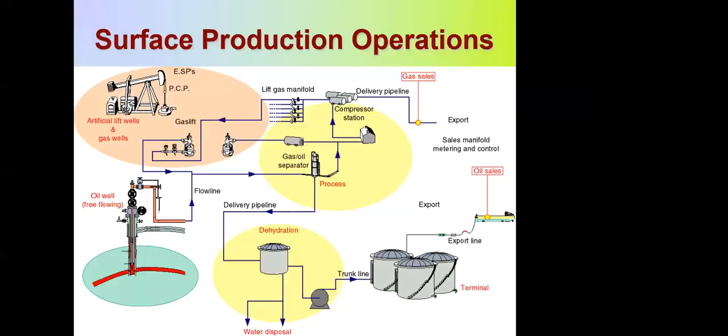Thank you very much, Niharika, for the brief presentation. Within these 2 days, today and tomorrow, we will talk about surface production operations, and also mention the facilities used on the surface for these operations. After getting the oil out of the wellhead, what shall we do with it? How can we make the crude oil suitable for the market? That's the aim of this workshop today and tomorrow, and during that we will cover a few activities and points in the agenda.

As Niharika mentioned, I am a petroleum engineer, so I am in the heart of the business. I have more than 40 years of experience mixed between academia and industry. I used to work in the oil fields, onshore and offshore. I worked in Iraq onshore, south of Iraq, in Rumaila, Basra, and also in UAE, Abu Dhabi, Adnoc. I worked in Aberdeen in Scotland, North Sea. So I mix between onshore and offshore. My PhD is in reservoir engineering, but my MSc is in production engineering, so I mix between production and reservoir.

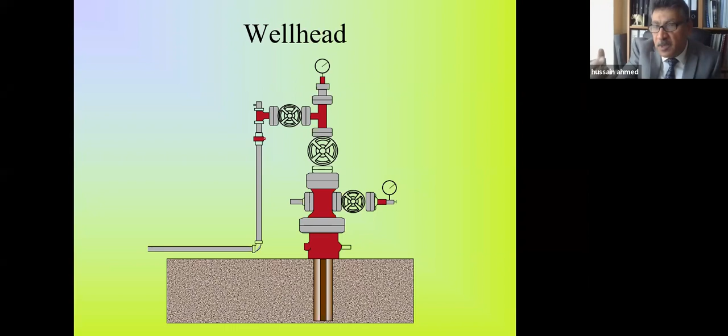Separators could be of different shape, different size, different design, both externally and internally, but one principle: the principle is to separate gas from oil and also to separate water from oil. So in the separator I have one input, but I may get three outputs: gas, oil, and water. It depends on the properties of my crude oil.

So that is, for example, the wellhead. This is just a typical flowing well, I can say - natural flowing well sometimes, and sometimes, of course, the well could be flowed and produced artificially. So this was the production equipment, which is our workshop is about - the production equipment and operations. The first equipment we go to is the separators.

I need to know how it works, what's inside them. At the same time, I need to know this oil flowing in the flow line from this well - is it natural flow, depending just only on the pressure of the reservoir? Or did I use something else to make it produce, such as a gas lift or ESP, or the RSP, the rod sucker pump?

Did I do any water injection or water flooding? Did I do any gas injection or gas flooding? These are important. Why important? Because it will affect the production rate and also the content of the crude oil.

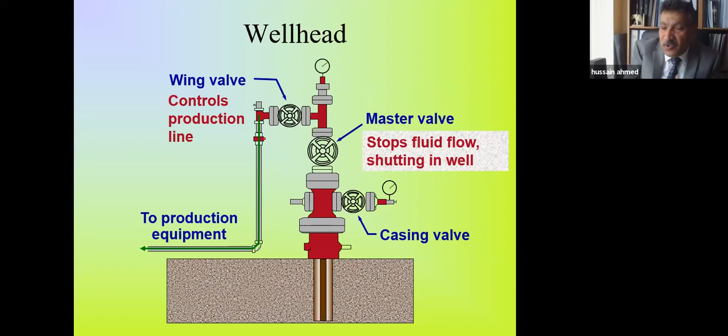Most of the people in mature fields are suffering from water cut. They say we are very much suffering from too much water coming to our separator. And this problem is sometimes because of emulsion, because of scale buildup, because of corrosion. And then I need to know where the water is coming from - is it natural water, or because of my water injection or water flooding or whatever? So it's important to know what have you used in order to produce the oil from the wellbore.

And even the water, after you remove the oil out of it, what shall I do with it? Shall I throw it in the open lake or open river? The answer is no, because it still has something inside it. So I need to have a disposal well, for example, to inject that water in a certain formation in the ground. Or maybe if I treat and keep it properly, I may use it later on for water injection.

If somebody asks me, in production I have produced water, but I have treated that water - now the water is treated very well, has a good pH value, has no sand particles, not much oil left behind it - can I reuse it in water injection? The answer is yes, you can. I'm talking about the water after de-oiling.

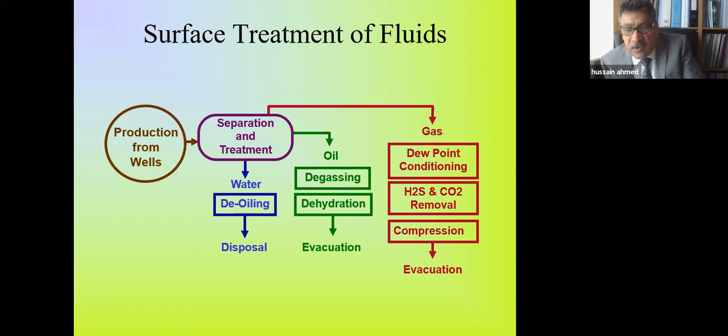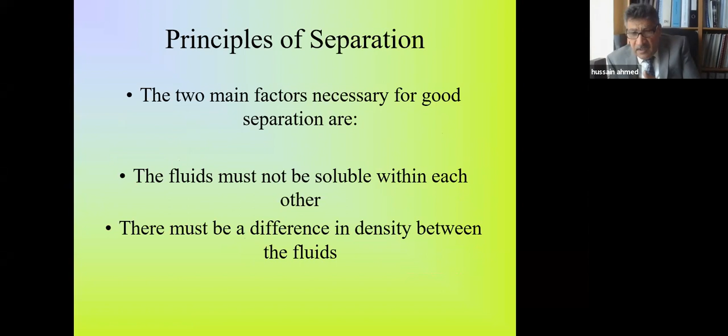I mentioned to you the principle of separation is based on the idea of gravity as well as pressure differences. So pressure differences and gravity separate, segregate oil from water, because water is heavier than oil, and gas comes out due to pressure differences.

This, I will let you know now. I will not go through the slides one by one or word by word, because there's no time to cover that. So I will give you a nice brief idea.

Does the separator take all the gas out from stage number one? The answer is no, some of the gas could remain. If plenty of gas remains, then I have to build a stage number two or stage number three. They call them the trains.

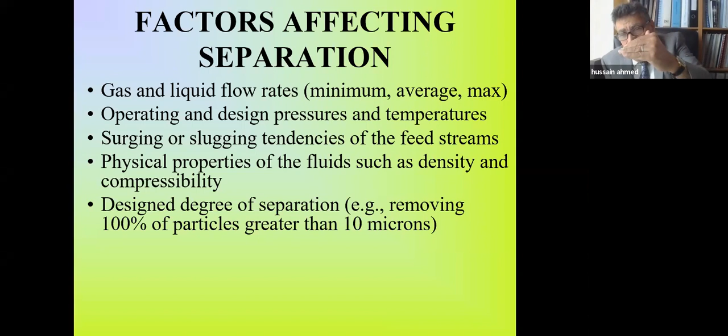And do the separators only take the gas? The answer is no, it takes the water out of it too. What do I mean? I mean, in this case, I have a barrel or a vessel or a tank which has three compartments inside it: one for gas, in the middle oil, underneath we have water. Sometimes we call it a three-phase separator.

So for separators we need to think about pressure in it, capacity, flow rate, how much in, how much out, and retention time. How long does the oil stay in the separator to be separated? How long, 1 hour, 2 hours? The answer is no, no more than 3 minutes.

Sometimes even less than that, 2 minutes, 1 minute is enough. You cannot leave the oil inside the separator for a long time. It's a continuous process, continuing every single minute. So the retention time is short, should be around 3 minutes. They say between 30 seconds, half a minute, to a maximum of 3 minutes, depending on how much gas is in it, how much water is in it.

As well as the other things in the oil. Does the oil have sand? Does it have paraffin, wax in other words? Does it need more chemical additions or additives? It does have salty water, and the salty water has scale. The scale is made of calcium and magnesium. So if that water coming with the oil is rich with calcium and magnesium, it builds scale inside it. These also are important to be looked into in terms of treatment or operations of the produced oil.

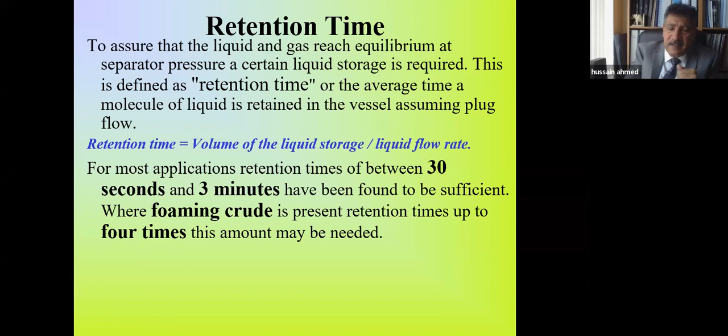Don't forget, retention time also sometimes depends on the API of the crude oil. A lighter, higher API needs more retention time. But if you have heavy oil, maybe smaller, because there's not much gas inside it. Heavy oil with API 24, 22, 20 usually doesn't have too much dissolved gas inside it. They have asphaltene, yes. They have paraffin, yes. They have sand, yes. But not much gas.

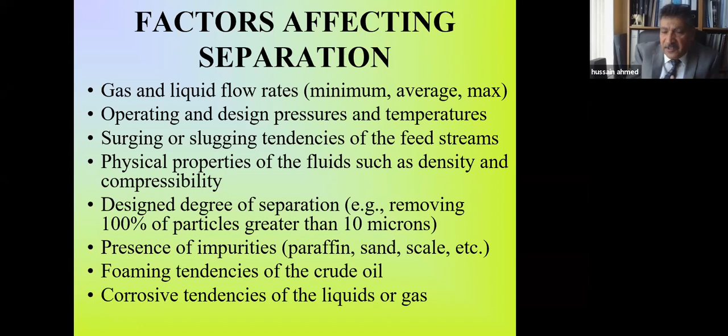Lighter oil, API 33, 35, 36, 40, has a higher GOR or more gas inside it. So the retention time should not be very large or very long - it should be short in this case.

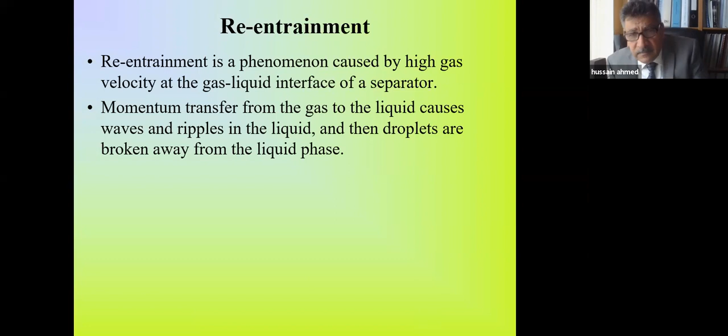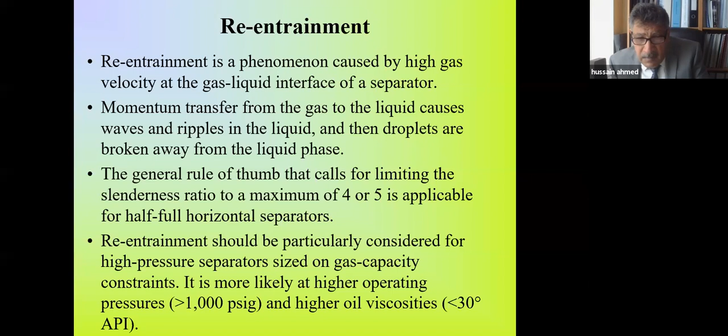You have re-entrainment, which is a problem of splash between gas and liquid, or gas and oil. These are like misty things, and they could lead to what I call carryover, liquid carryover. So it should be minimized by at least controlling the pressure and keeping it always steady. The separator could be done in one stage or two stages, depending on how much gas you want to remove.

As well, we have something called the free water knockout. Especially if the water cut is very high, it's recommended to put the oil into a big tank, leave it quiet, let gravity work - by this the water will settle first and the oil will be on top. We call it the free water knockout.

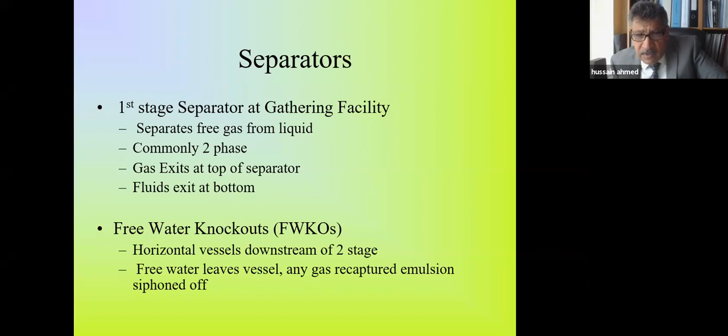This slide is about one common problem in the produced oil: the emulsion. Remember this word, emulsion. It's a problem - if we have too much emulsion leaving the free water knockout or the separator itself, then it's not good.

Always remember, the higher the water cut, the more the chance for emulsion. Emulsion is a mixing of two different liquids, water and oil. They don't mix properly because of difference in viscosity and surface tension, but they create a phase where the main body is water with oil inside it - we call it oily water.

Or the opposite: the main body is oil, with some droplets of water suspended in that body of oil. They don't settle down because either the oil has a big viscosity, or maybe the oil is heavy with a high gravity factor, or the size of the water droplet is too tiny to settle down.

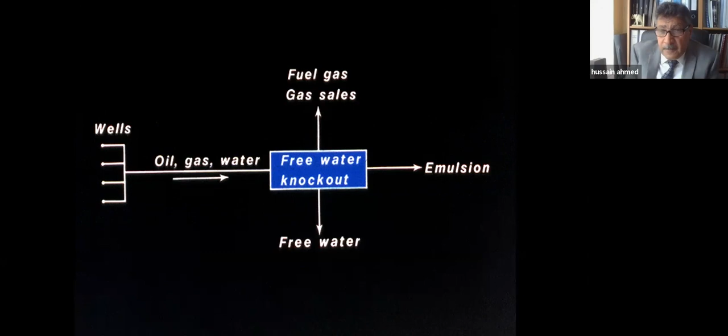So we have an oily water and a watery oil - major body is oil with some water droplets aside that need to be treated. We're going to, hopefully today, explain some of these methods.

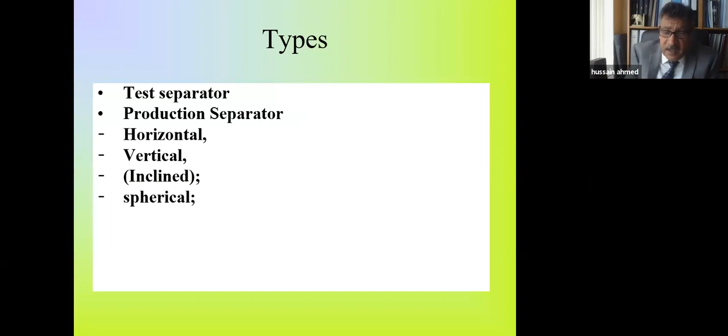These are in gas reservoirs, so I won't talk about that now. The separators come in different types - could be vertical, horizontal, spherical, two-phase, three-phase, and so on.

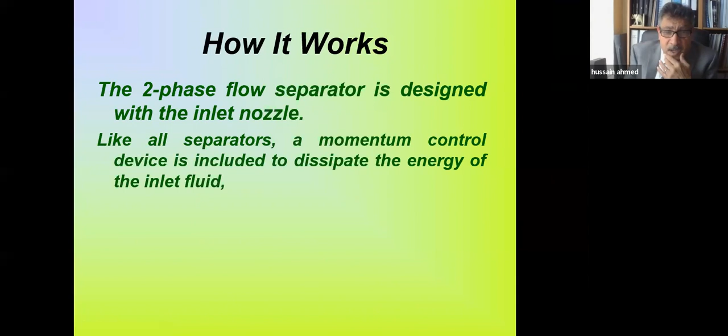The separator is based on the idea of pressure differences built up, and that helps in dealing with them. The pressure inside the separator is less than the pressure from the wellhead, and that helps the gas to come out. Also, the gravity factor: water is heavier than oil, so it settles down because of gravity.

We have something called, sometimes, the Vortex Breaker, a small mechanical unit at the bottom of the separator, on the outlet of the water and oil pipelines, or takeoff. These prevent the escape of gas with the oil or water by breaking the vortex.

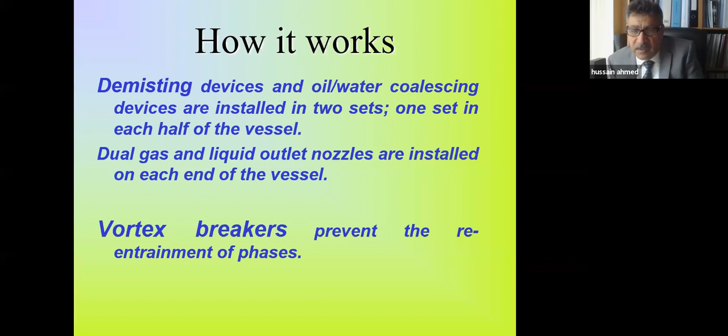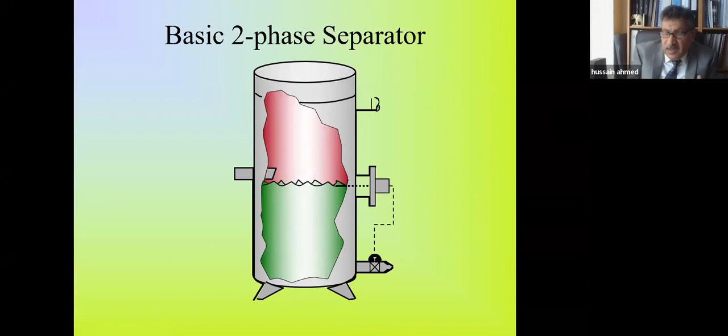So you have a flow coming from the wellhead, or from wells, more than one, coming inside the separator at a certain pressure. Could be 200 psi, 250 psi, sometimes 300 psi. And the size of the pipe entering is about 6-inch, sometimes 8-inch.

Once it enters, it hits a baffle and they separate gas from oil. That gas needs to be treated later on, and the oil also needs to be treated later on, as mentioned earlier. We have something called the level indicator.

Sometimes you have a sight glass as well to see the level of oil in the separator. But this is, of course, a controller. A signal will go to this control valve. So if the level of oil is building up and there's too much oil, it will open wider and take it out.

If the oil level is getting lower and lower, and water is coming at the bottom, then a signal will go to the valve to close, to not allow the water to come through, separating properly. So the valve opens or closes according to the oil level, which you set up at a certain level.

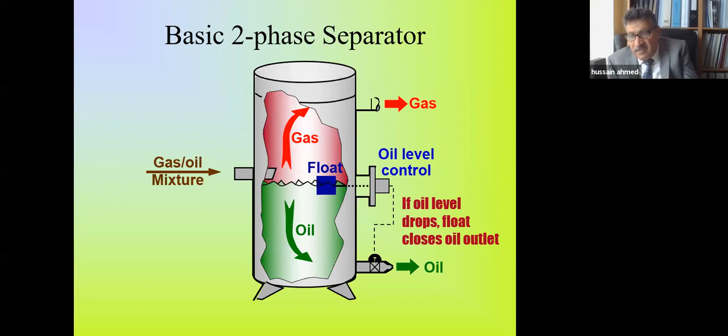This is another type of separator. We call them, again, separator vertical, horizontal, spherical, two-phase, three-phase — all work under one principle. The principle is to separate oil from gas based on a pressure drop, and to separate water from oil based on the principle of gravity and density differences. Whatever it is, the shape doesn't matter.

In the entrance of the separator we have something called the inlet diverter, or sometimes inlet baffle, or momentum absorber. These also slow down the movement and help separate the liquid from the gas.

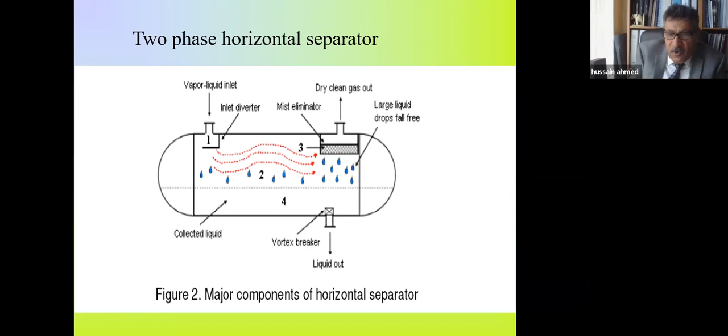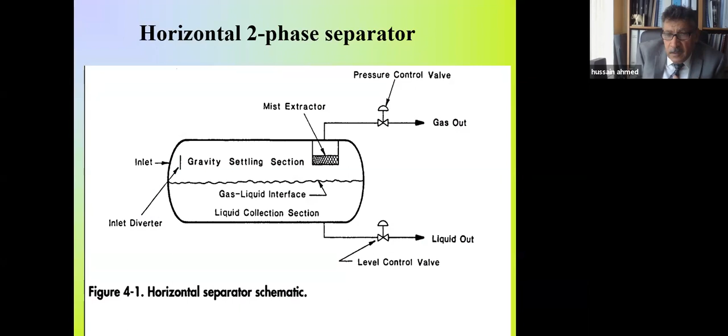This is horizontal two-phase. This is horizontal two-phase. This is horizontal two-phase. This is vertical two-phase, the most common one usually. This is also horizontal, vertical two-phase, same principle I mentioned earlier. Same idea, so I'll not go through it.

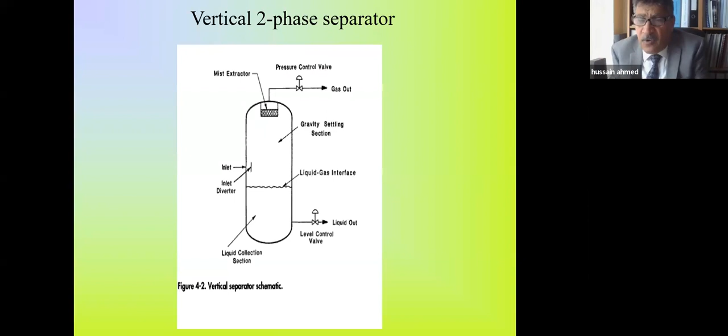Of course, there are some other factors to look into. If you are a designing engineer, the question is how do they design it? How do you know that this size of separator is enough for this oil field, or for this gas oil ratio? So we have designing elements, calculation elements, in terms of what they call the gas space or the gas compartment, the top one. They calculate that according to the pressure, density differences, diameter, discharge coefficient, and so on. This is not our topic for today, but it could be covered in more detail if we do a course on that - then we'd have more time to explain and do calculations.

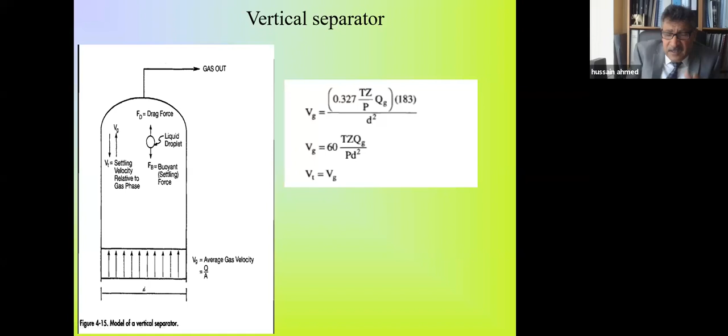Again, the gas velocity, VG. How do I calculate the gas volume, the gas compartment part? How much is it, how can I calculate the size of it? These are the equations used for that. Again, it's not part of our workshop for today, because if I do calculations, I need more time.

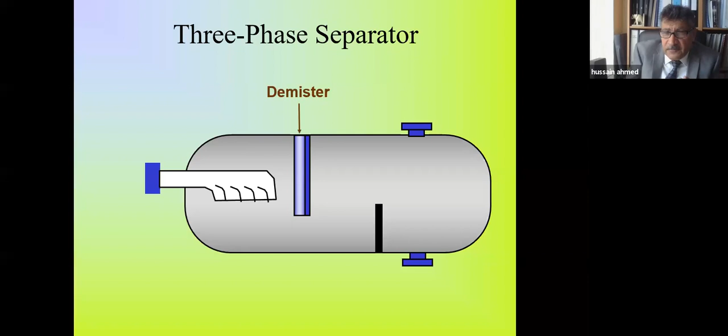Horizontal two-phase, and also we have horizontal three-phase separator. These are the most common ones, and they are very much used nowadays in most of the oil fields.

A three-phase separator - I'm asking you, why three-phase? The answer: because we have three flows out of the separator. We have water stream, gas stream, and oil stream. So three phases.

What about sand? Sand may be accumulated within the water part. What about H2S? H2S is within the gas flow. What about paraffin? You mentioned paraffin is a problem - paraffin will be inside the oil. What about scale buildup? The scale will be in the water compartment, because scale, based on the type of salt - calcium or magnesium - is in the water.

We have mentioned the demister in different ways, could be on the outlet, could be in the middle of the separator. A new word now came to me: weir, another internal component. So remember, now we have mentioned internal components for the separator. We mentioned the inlet diverter, we mentioned the demister or mist extractor, and now we are mentioning the weir.

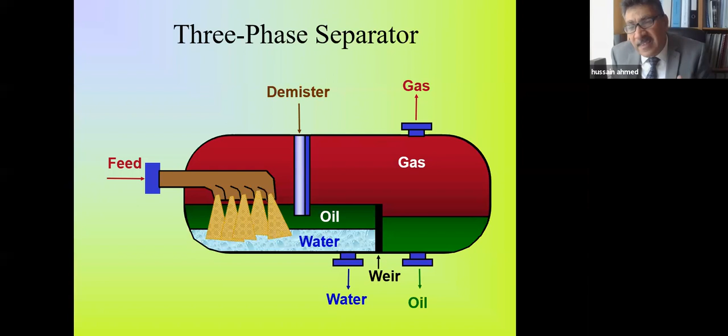I repeat myself: the name will be the name, three-phase or two-phase, horizontal or vertical. The principle remains the same principle, which is density differences and a gravity factor. But the designing is different - you see, this is the designing.

There's another one, another three-phase separator, but in a different design. I have one inlet and I have three outlets: a gas outlet, an oil outlet, and a water outlet. But the designing is a different way, different designing.

This was something else. This is also a typical three-phase separator, horizontal one, as I mentioned to you earlier, and we mentioned the weir and so on. So same principle as we have.

Externally, now - I have mentioned to you internally I have inlet diverter, weir, vortex breaker, demister - these are the internal components. The external components, I could see something like a pressure gauge, a thermometer or temperature gauge, I can say.

This is a sample of a pressure safety valve or pressure relief valve. That's on the top. They send the gas to the flare if needed, in case of emergency shutdown.

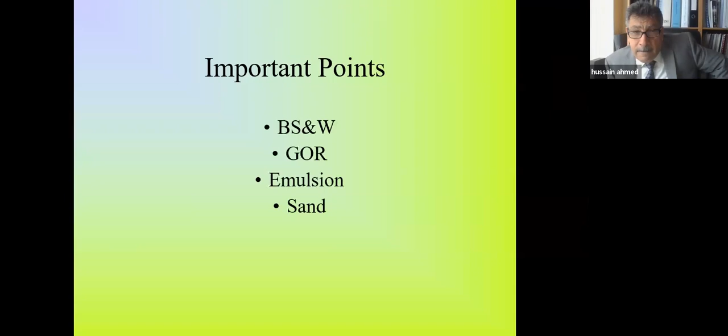So the important issue I need to know as a production engineer is how much water I have. We call it BSW, the basic sediment and water, or sand and water. How much sand, because plenty of sand sometimes could lead to a blockage inside the bottom of the separator.

Too much sand settled at the bottom of the separator, especially on the water compartment, will reduce the holding capacity of the separator. Remember, I have 3 compartments in the separator: one for water, one for oil, and the top is for the gas.

And there's some kind of interface sometimes. We call it an interface here between oil and water, oil, emulsion and water. This word emulsion, I don't like it, it's a problem. So emulsion is one of the problems.

Too much water and too much sand is also a problem because they will block the bottom of the separator and need to be washed from time to time.

The GOR, that's the associated gas - I need to make sure the gas leaving the separator is as dry as possible, free from any liquid or condensate. This is what we call the demister's job.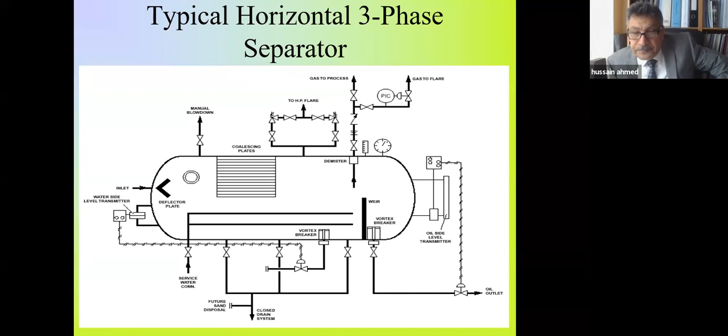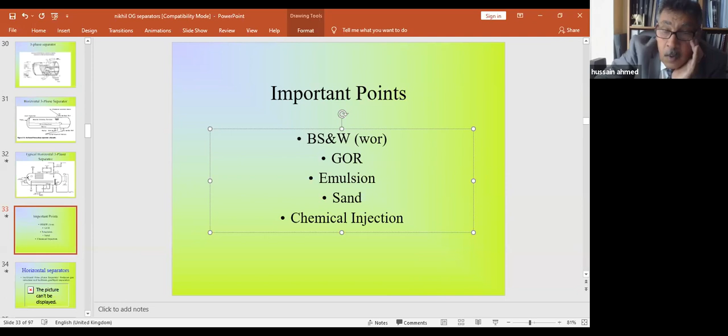So these are important points to consider when we talk about separators. You should ask how much water cut, water percentage. In certain countries or certain companies, they name it WOR, water oil ratio. It also needs to be known.

GOR, same as gas oil ratio, or we call it associated gas. Emulsion, sand - I don't like it, I need to treat it and remove it.

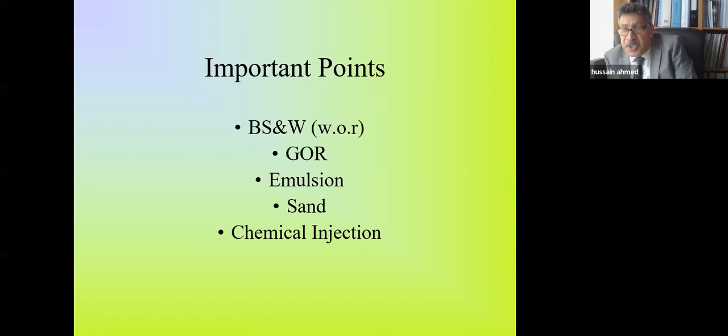And chemical injection - why do I need to inject? I already mentioned I inject demulsifier, I inject antifoam or defoamer, I inject corrosion inhibitor, and sometimes I inject softener to remove or stop scale buildup. These could be some of the chemical injections.

Of course, they have different trade names. I don't know the trade names, I just say in general demulsifier, and I say antifoam additives or defoamer, or corrosion inhibitors, or anti-scale or softeners. Therefore, it's crucial to be aware of these chemical additives, as it's part of my operations.

Remember, our workshop is about production operations, and one of the most important operations is the degassing station, the separation of the separators. And within the separators, you have problems.

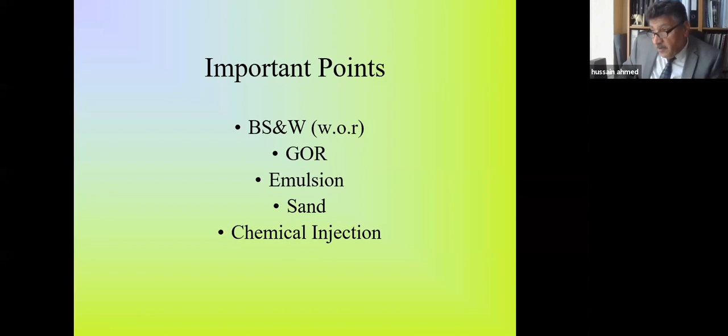So you need to know how I deal with it. Within the separator, you need to know what are the internal components inside them, and what is the function of each component. If somebody says to me, Vortex Breaker, I need to know where it is, what it does, and how it could go wrong.

The Vortex Breaker can go wrong if we have too much scale buildup in the water section, or too much wax in the oil section. By the way, if somebody talks about scale problem, that usually happens in the water section. If we talk about paraffin blockage, that happens in the oil section or oil compartment.

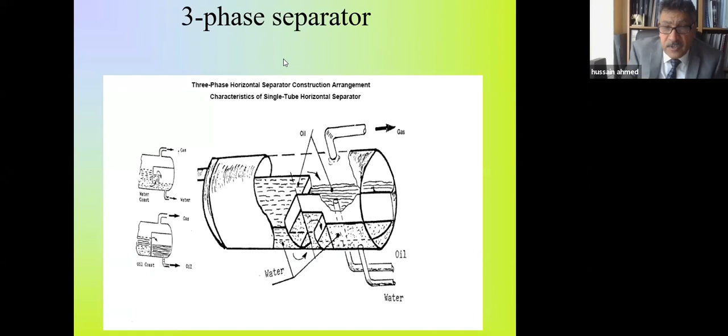If we talk about emulsion, that will be at the oil and water interface contact. In that area, in that line, I have an emulsion because the oil is in touch with water, and due to turbulence we have that issue. I hope these messages are clear and useful for you.

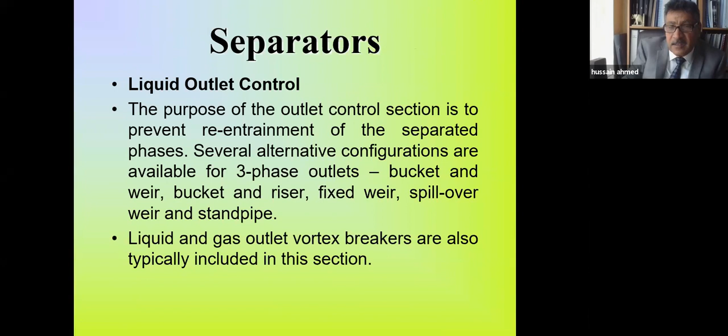Of course, liquid leaving the separator, whether oil or water, should be under control - flow rate, quality, and so on - and that's important to look into as well.

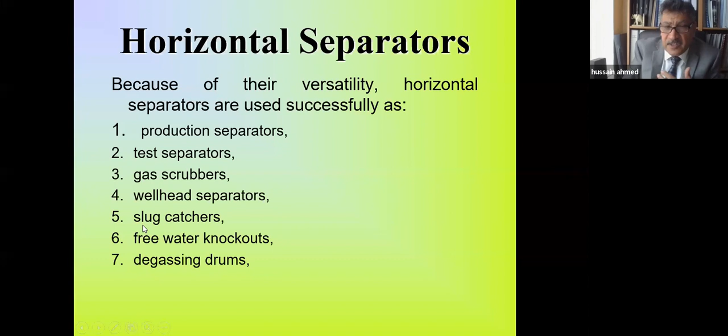Sometimes you also call it a separator to catch the sludge. Sludge is a mix between heavy oil, water, and some sand particles. If free water knock out, if you have a high water cut...

65% or whatever, and then you have free water. We have two types of water, by the way. We have free water, which has no oil in it at all, and we have oily water, which is the emulsion, which needs treatment.

This one, the treatment in number 6 - not much treatment needed. This could be used later on as water injection in the future if you want to treat it in a proper way.

Maybe on pH value, if you make the pH about 7, because most of the free water has a pH less than 7 because of the H2S dissolved inside it. So it's acidic. Maybe it has some sand particles, so maybe it needs filtration and some kind of dilute caustic soda, alkaline additives, to control pH value.

And number 4, do we have something called - well, yes, sometimes people call it just wellhead connect, small separators for smaller production, only one well. We could also connect directly, usually spherical in shape.

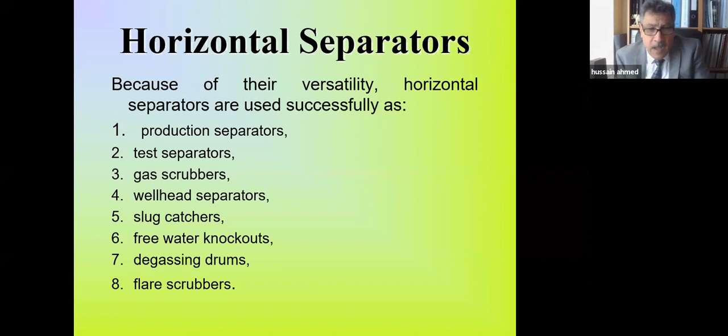Flare scrubbers as well. If you see at the bottom of a flare, there's a little hump where the liquid comes through it as well.

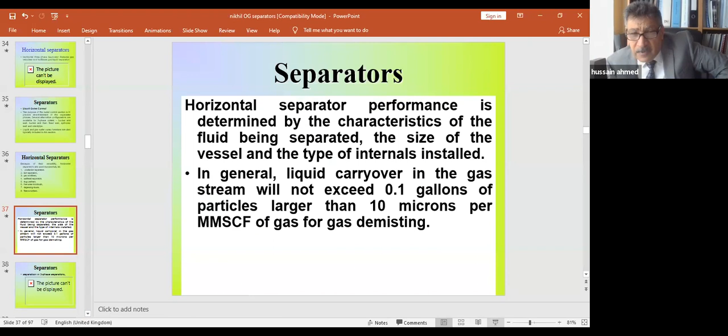How much is allowed? This question comes up, and I like this question actually - I like this piece of information. How much is allowed for gas to carry oil with it? Carry over - how much carry over?

They give a limit or a standard. They said if 1,000,000 cubic feet - 1,000,000 scf, standard cubic feet - carries only 0.1 gallon of liquid, could be condensate, could be hydrocarbon, that is normal, that's acceptable.

So if I go for a separator like this one, and I say gas out, for every 1,000,000 cubic feet of this gas out, if I have 0.1 gallon - 0.1 gallon is about 300 to 350 milliliters of liquid - then it is acceptable. That's the meaning of this carryover, which needs to be looked into.

Of course, the mist extractor or the demister should capture liquid at a certain size. Sometimes you say 5 microns, sometimes 10 microns - no size larger than this should be allowed to leave.

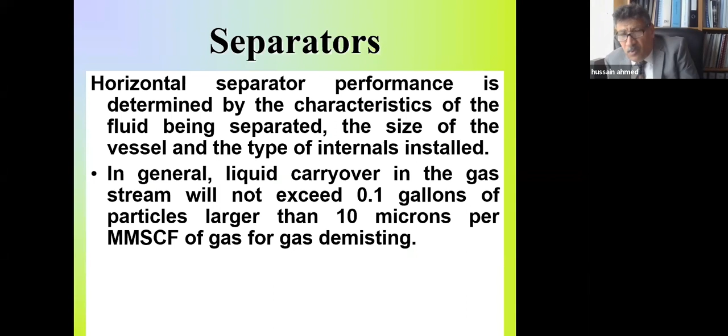So remember this now, make a note of it. The acceptable standard, the acceptable operating standard for liquid carryover with gas, is about 0.1 gallon for every 1,000,000 cubic feet leaving the separator.

And the size of the liquid droplets should be no more than 10 microns. That little information could be a standard information.

That will give you a drier oil, especially if you have a large water cut, too much water coming through. The water cut, the water oil ratio, depends on the pressure depletion in the reservoir, depends on water coning issue in the reservoir, depends on the perforation location in the completion process of the oil, depends on the water injection process, especially if we have early breakthrough or heterogeneity, or fingering.

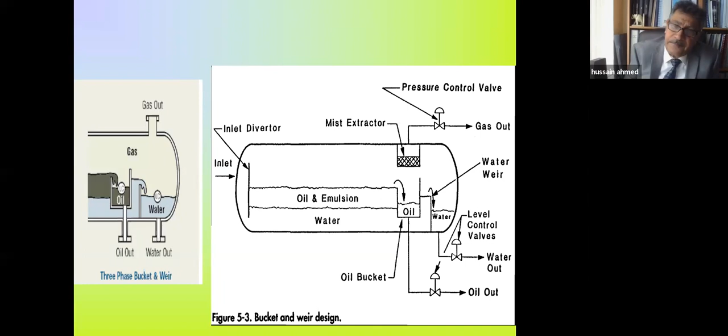These factors sometimes affect the value of water oil ratios in my production. Another design on purpose - I brought all these slides to tell you the same principle, but different design.

Again, we have oil, water, gas, demister - and this is the shape of the demister, a plate, a zigzag plate. We call it coalescer sometimes. Coalescer means gathering. Coalescing means gathering droplets of liquid together, making a large one, and they fall down. This is coalescing.

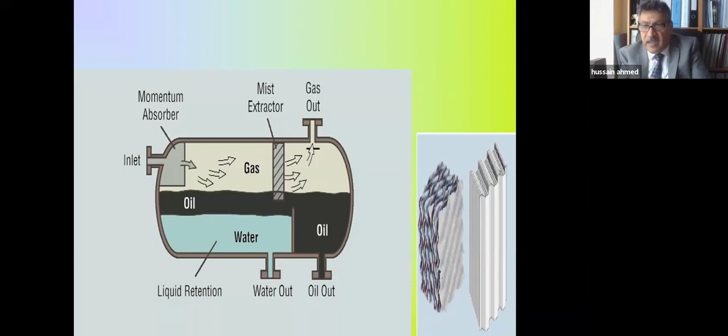Another design as well, so I'll pass through that. And swirl - for example, if I have small particles or demister, can I do the centrifugal hydrocyclone? The answer is yes, it can help.

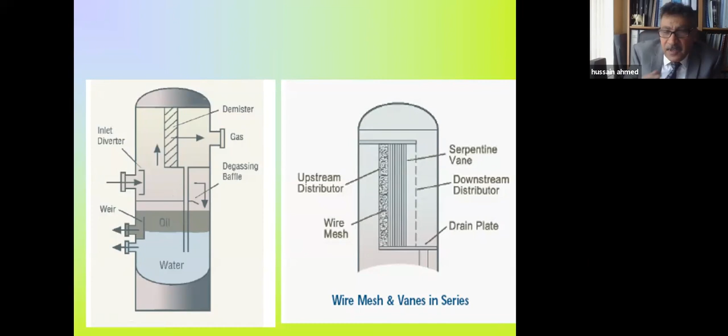These are on slide, another design for vertical three-phase separator. This is vertical three-phase separator - oil, water, and gas on the top. And you should think about the design issue, demister as well. Same name, demister, inlet diverter, gas outlet, water outlet - same names, but different design, different design.

The vertical separators are usually suitable if you have large water cut, or you have a small space, especially if you are on an offshore platform, or you have too much sand production. So vertical separator is suitable for small space on a platform offshore. Water cut is high, sand production is high, and it helps also in gravity segregation.

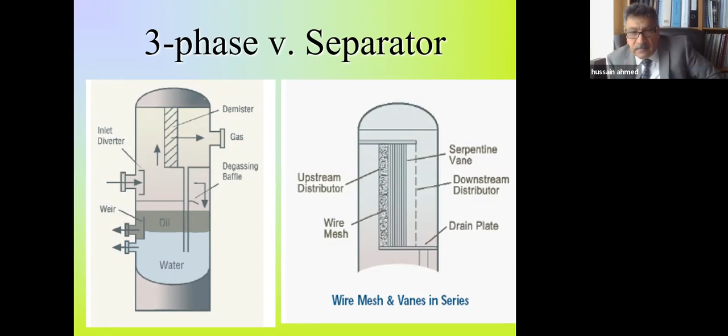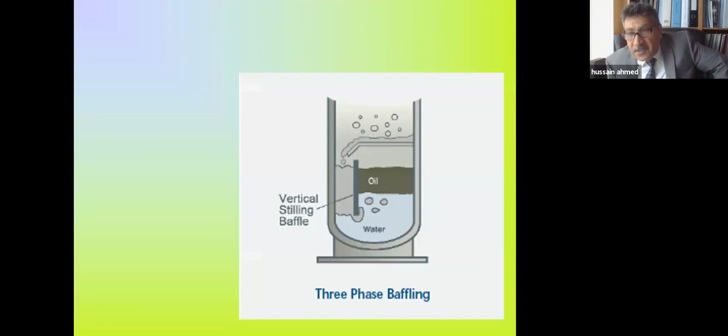Another example of three-phase vertical separator, another example of three-phase vertical separator - different designs, very different designs. But you need to know these things as operating engineer, as a process surface production engineer. It opens eyes sometimes - I like it very much because I did a design course when I was in university, and I love designing things.

It gives you an idea. For example, in the design, they told me that I have too much water, so I know this area is called downcomers, and this is the baffle, looks like a weir anyway. On purpose, from the gas compartment, if the liquid drops in, I try to make the liquid go inside the water, not inside the oil. Then if it's water, it remains in the water. If it's oil, because of the gravity factor, it will go up and join the oil. And by this, I separate oil from water as well.

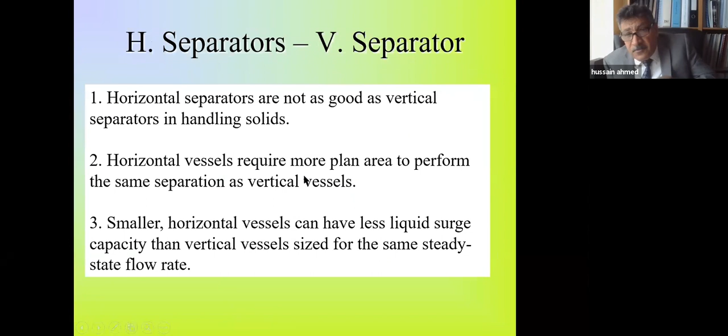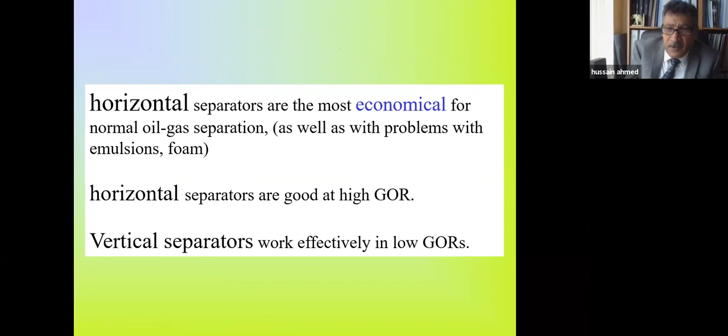So these horizontal separators are very good for larger production rate, larger gas oil ratio, suitable for it as well. They are economical because you can handle too much oil at once, and it has little problems with the production rate. But of course, it has a foam issue and emulsion issue.

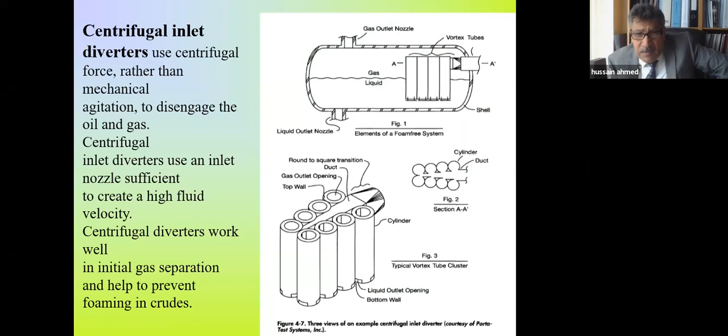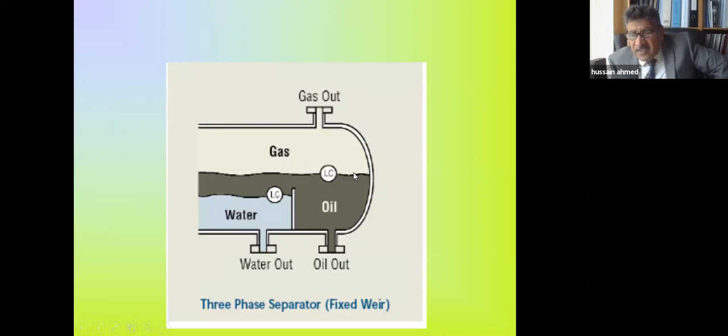One issue is if I have a liquid surface in a horizontal separator like this, and the gas is moving from left to right, the gas may create a wave, making the surface wavy, like a wavy sea or ocean. If you have that wave, some of the liquid will escape with the gas—you lose your oil, you lose your condensate. So I put baffles on top, covering that surface to prevent that wave from happening. The baffle helps prevent the wave from being created.

Foam, as I mentioned this morning, can be broken down either mechanically or chemically. Chemically, I add anti-foam additives, a chemical that breaks the surface tension. Or mechanically, I put a baffle or blades inside the separator—pieces of metal inside the separator. So when the gas passes through, it breaks the foam, it breaks the bubbles.

In summertime, children play with bubbles—they take soap and water, blow, and make bubbles. Those bubbles come because of surface tension between air and soap liquid. The foam inside the oil separator forms between the gas and the viscous oil. If I don't remove that foam, it will reduce the efficiency of separation and encourage liquid to escape with the gas.

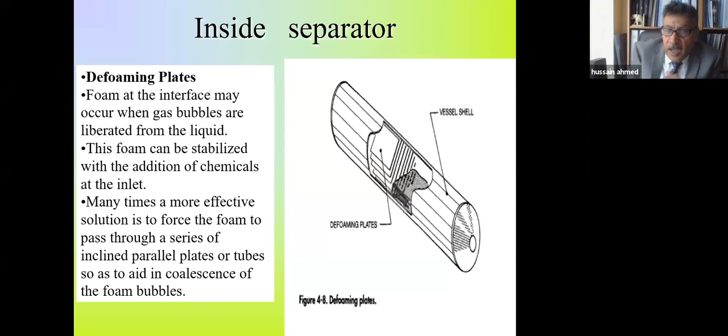The allowed amount is 0.1 gallon for every million cubic feet, but if I have foam, that 0.1 could change to 0.5 or 0.6—I will lose more condensate. So how do I break it? Chemically, I add anti-foam additives, or mechanically, I put pieces of metal inside the separator to break the bubbles and prevent foam. So remember, wave is a problem, foam is a problem, vortex is a problem.

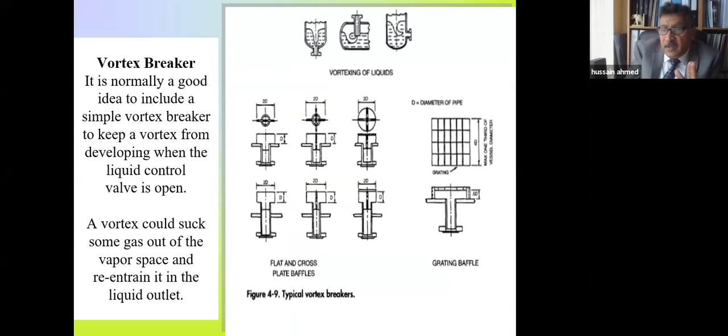Vortex is due to pressure and level. If the pressure is very high and the level of water or oil is very low, the gas will push through, make the water escape like a swirl, and the gas will blow by. Then I lose the gas and I will damage my pump, whether it's a water pump or oil pump.

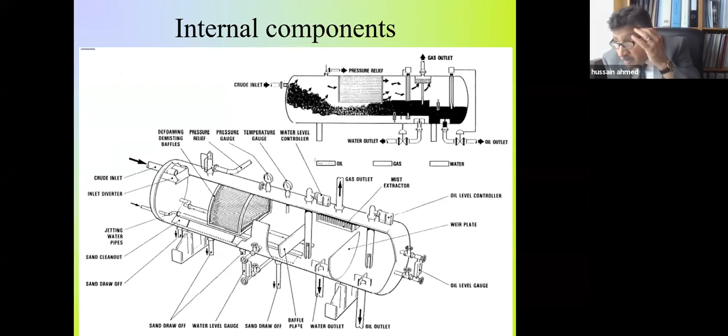Connected to my separator, I have an oil outlet connected to a pump. If gas comes with the oil, the pump will be confused and the valve will be damaged. I get vibration and knockdown of my pump because gas and liquid go inside it, and the pump is not designed to pump two phases—it's only designed for a single phase. Then I will damage the pump due to vibration.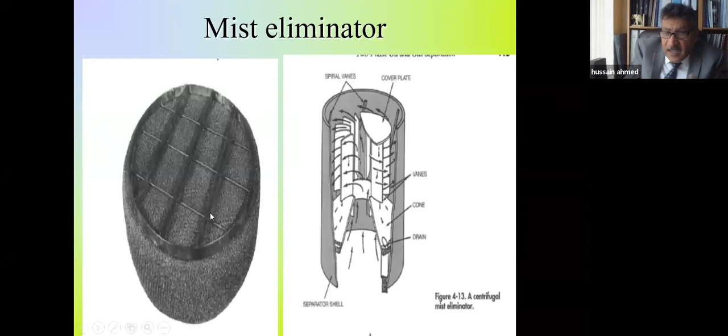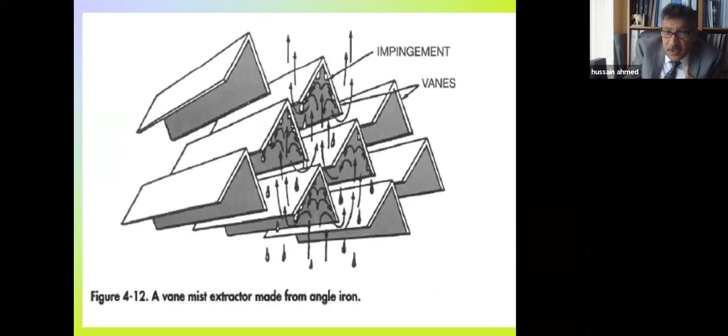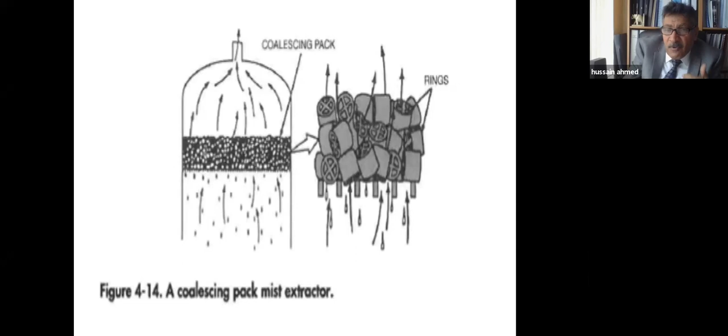Demister is a problem, mist eliminator. So mist escape, we call liquid carryover. I have to stop that, and we have different types of demisters. Could be like this, like a mesh, could be hydrocyclone, could be zigzag vanes, could be channel vanes, coalescer, different designs. Could be like this one, the angle iron, which is like a V shape vanes. So different designs. This is also a kind of coalescing pack. These usually we see in the gas streams to capture liquid droplets from the gas down to 10 microns, which is very good.

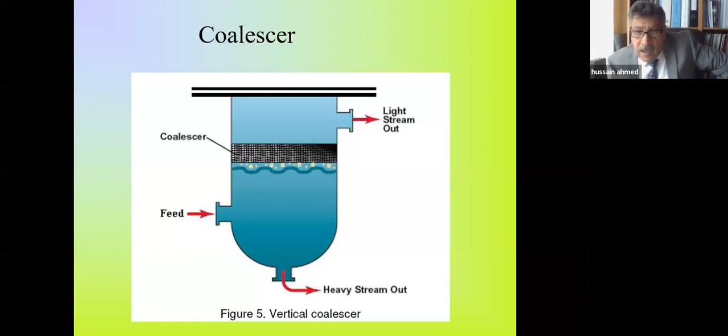Demister again here, we have coalescer or demisters. Remember the word coalescer or demister, they have the same principle. Both of them remove liquid droplets from the gas stream. Both have that principle. Different designs I'm passing through. These are gravity separators usually for the gas phase separator. This is a design as well.

I brought all the designs, possible designs with me today just to show you that production operations, especially on stage number 1, the gas station, need from me as an engineer to understand the different types of separators and why. Why do I use vertical, why use horizontal or spherical?

Here, if I ask you about the gas outlet, why does the gas outlet pipe go upward? The answer: to make sure the gas leaving is free from any liquid as much as possible. Here, the gas liquid out is taken from down up. How it moves from down up is due to pressure differences. Pressure of oil is high and pushes it up. Same thing with water cut.

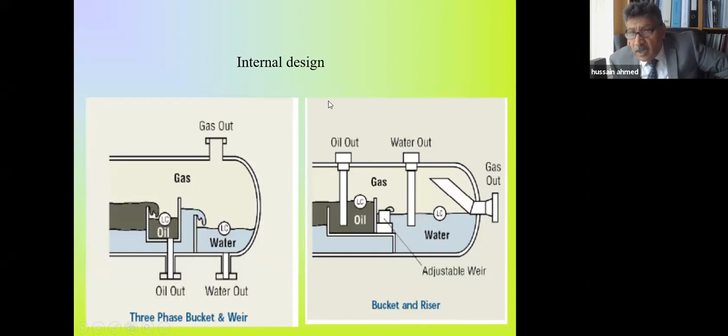Different designs are important to give you a successful job. Spherical separators are also common in low production rate, we talk about 200 barrels per day. Could be one well, could be 2 or 3 wells together. The principle again depends on gravity and so on. So the inlet, here we have the inlet diverters, different shapes, semi-spherical, half a circle, half a sphere. And the demister, the clever part of it, the gas will go up and come down again.

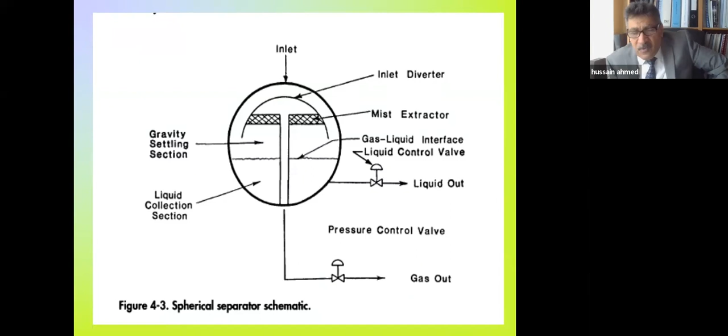This is another type of 3-phase, or actually two-phase spherical separator. You have 2 outlets, the gas outlet and the liquid outlet. Same, I think, you also have a pressure gauge, sight glass, pressure safety valves and so on. So another one. This one we call sometimes the double barrel. This is common in high gas oil ratio or gas condensate reservoirs. So you have the inlet, plenty of gas taken out. This is usually condensate taken out of it. Gravity plays an important part, demister in this case.

This one, if you remember I mentioned sand, and I mentioned sand is a problem. So one way to remove sand from oil, or especially from gas, is to put inside the separator a filter to filter out the sand particles. So you put here, clearly the gas out will be free from any sand particles. The condensate will gather here. So in this case, I have gas, condensate, and the solid particles will be filtered out inside the filter.

That tells you separators have different internal components based on what? Based on the properties of my crude oil. Do I have heavy or light crude oil? Do I have clean crude oil? And many other things need to be looked into.

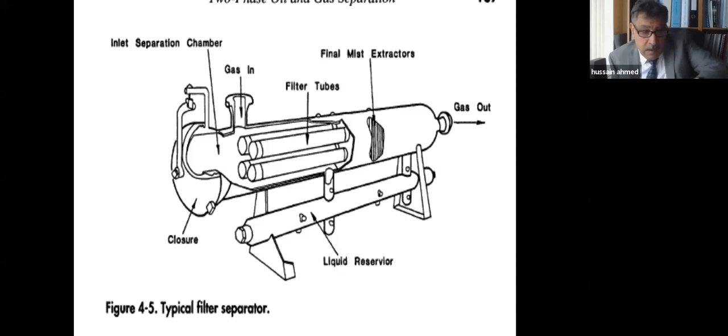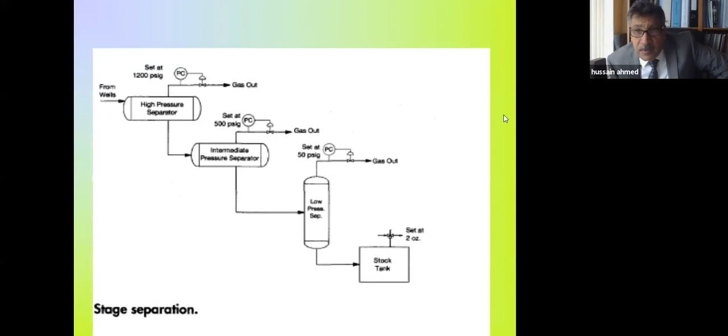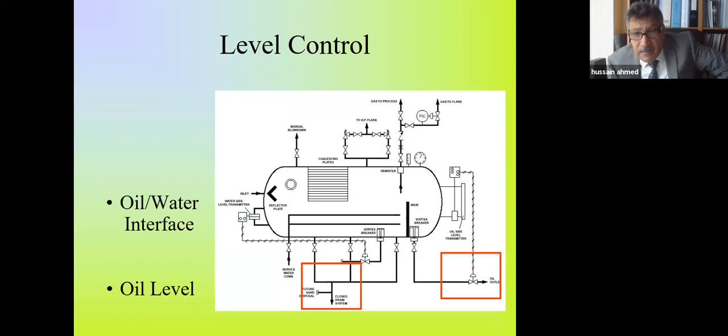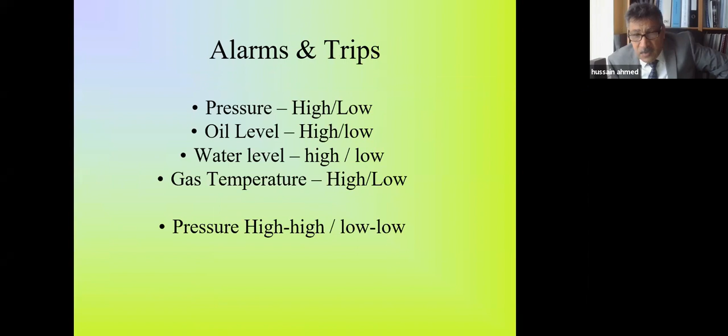Yeah, I will stop in 5 minutes, hopefully, because I will cover the timing, because somebody sent me a message to stop. We have, as a separator, sometimes different stages, and these are different information and things that need to be looked into. I mentioned all these factors already: instrumentation and control, level, pressure, temperature. The alarms, usually if the level is important, you have an alarm level for it, or for water and oil. Pressure also, you have to have an alarm for it. Temperature as well. These are the alarming things which sometimes need to be looked into.

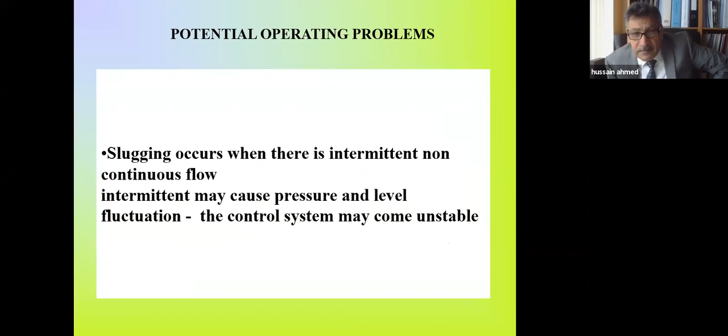These are problems I mentioned. Foam is a problem, paraffin is a problem I mentioned. And paraffin could cause a blockage. Remember I mentioned the blockage of the demister due to paraffin, waxy things. Sand I mentioned as a problem. Liquid carryover and gas blow by, I mentioned both of them. Slugging, I mentioned this word. So we can discuss many issues later on because it's a workshop.